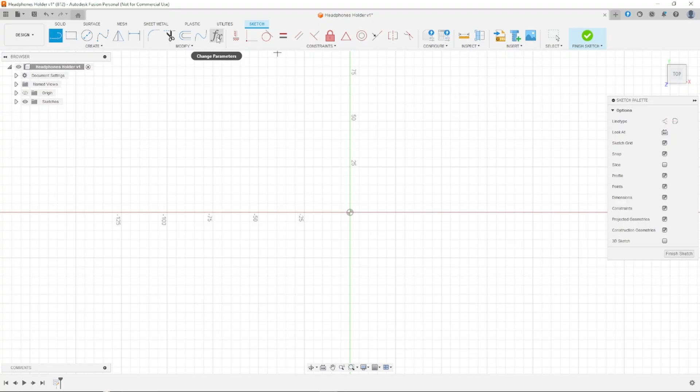After the sketch is created, I need to make some parameters. I start with main body thickness. I have a hard time deciding what the right thickness for the profile of the object should be as I eyeball the thickness using my calipers. I debate between a thickness of between 6 and 10 millimeters, but eventually I land on 6 millimeters to start with.

Next I measure the headphone's cup height, which comes to about 112 millimeters. After that I measure the height of the headband of my headphones. This comes to roughly 105 millimeters. I note in the video that the headphone's cup and band somewhat overlap each other, but I was fine with this detail and not very picky about correcting it, since it would just mean some extra fit tolerance space for the area around it on the stand.

I almost start working on the actual sketch, but try to get all of the measurements out of the way at the start here, so I continue making measurements.

Now I make the parameter for headphone depth. This is for the largest depth of the headphones looking at them from the side. Well, width if you're looking at it from the side. Which on this model is the swivel hooks connecting the band to the outside of the cups. So I measure from those points, getting 95 millimeters.

And for my final measurement, I get the headphone band depth. This will get the width of the headphone band, so I know how much room to put in the holder's hook to actually hold the headphones, which comes to roughly 53.5 millimeters.

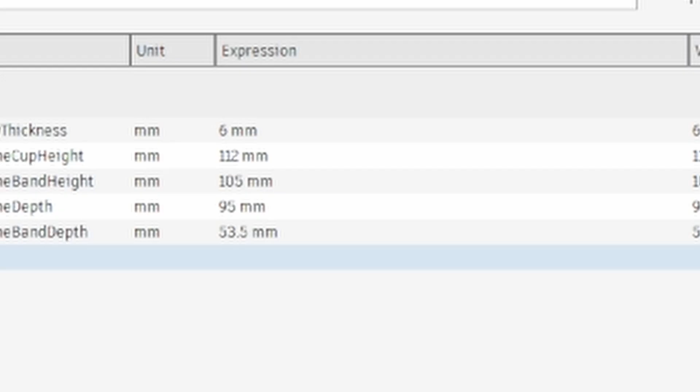After making these parameters, I start to finally work on the main body, though soon after I need to make more parameters again. So I make a parameter called stability fit tolerance, which I made equal 10 millimeters.

This is to give areas where the headphones need to actually fit some extra room, generally speaking, to fit. Then I add this and multiply it by 2 to the length of my initial drawing so far, making the string headphones depth plus, in parentheses, stability fit tolerance times 2. This makes it so that the total desired fit tolerance is calculated first, then added to the headphones depth parameter.

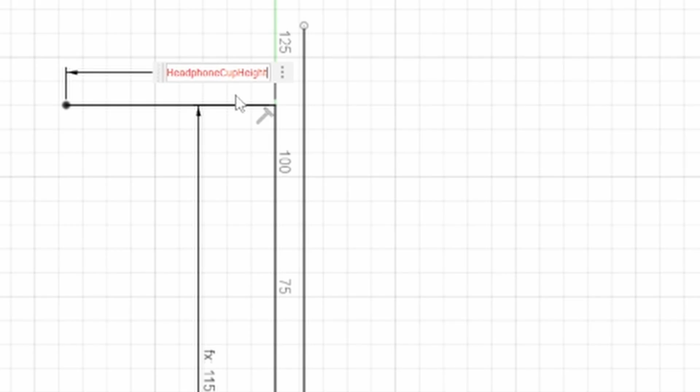I then continue to draw the basic shape of the stand. The string for the main backbone that I started calling the stem is headphone cup height plus headphone band height plus stability fit tolerance. This adds the two measured parts of the headphones together, resulting in a decent chunk of natural fit tolerance since I didn't bother accounting for the overlap that the two pieces had on each other.

That is also why I only added one fit tolerance parameter. I wanted to include it for good measure, but not completely overdo the fit tolerance.

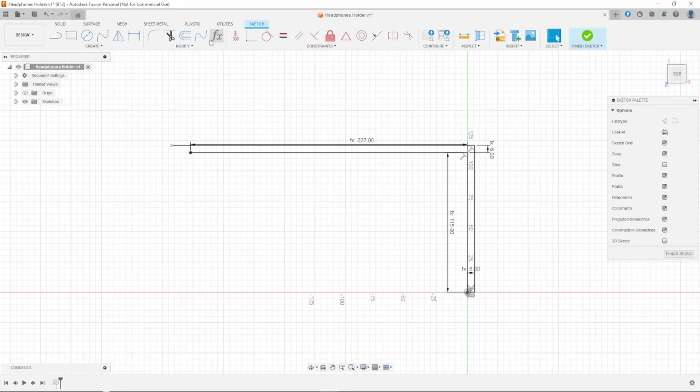Then I continued to add the outer border lines for the body, adding the body thickness parameter between them. But since I started drawing and looking at the thickness compared to the height of the part, I started thinking that the thickness wasn't going to be enough. But this is why we use these parameters. I went into the parameters table and changed the value of main body thickness from 6 to 8 millimeters and was satisfied with that thickness for the time being.

The next line is the hook that holds the headphones, so the string is headband depth plus stability fit tolerance.

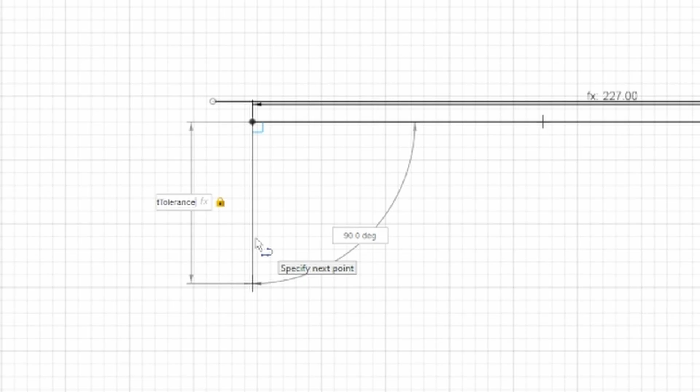I only added one fit tolerance because I didn't want to overdo the amount of extra space the headphones would have to move around on the hook. Before going on to the next line, I realized something was going to be off.

I go back into the string of the main hook line and add plus main body thickness to it. This is so the line ends at the proper point to allow the actual hook part to be created in the proper place.

I realized I never actually got the thickness of the headband to know the proper depth needed of the hook. So I take my measurement and make the parameter headphone band thickness, which comes to around 15 millimeters.

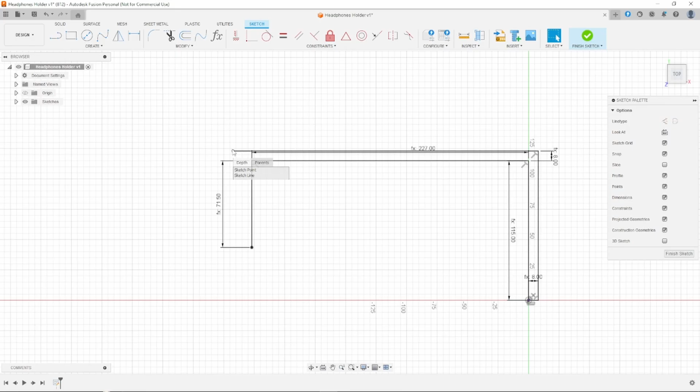To try and avoid issues with the drawing in the future, I try to shorten the length of the outer line already created, though I have issues with the snapping and getting it aligned properly. To fix this, I draw a line across the inner line where the outer line should meet it, then extend the outer line to meet with the new alignment line.

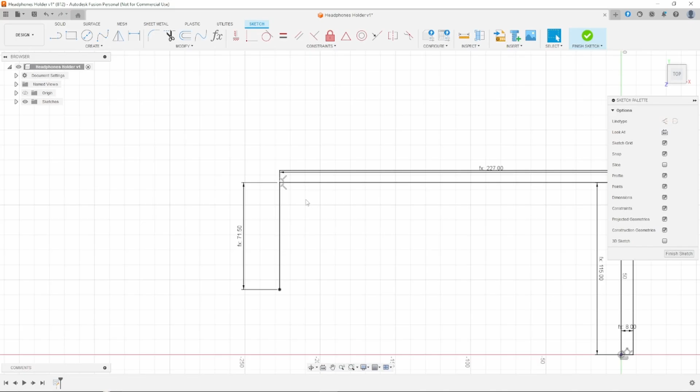After getting the right joints, I make the alignment line a construction line with the hotkey X. This will make it so the alignment line won't cut the part into different pieces and cause an interruption in the extrusion process. Just a small but useful detail.

Now I continue working on the hook. The string I start with for the outer hook is headphone band thickness, then add the top of the hook and give it the main body thickness parameter.

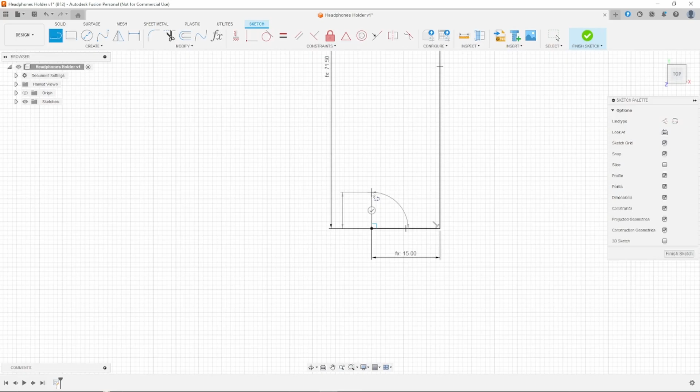I try to continue with the drawing, but it just looks weird as I draw it out. Then I realize I need to go back into the string and add main body thickness to the outer line to get the right height.

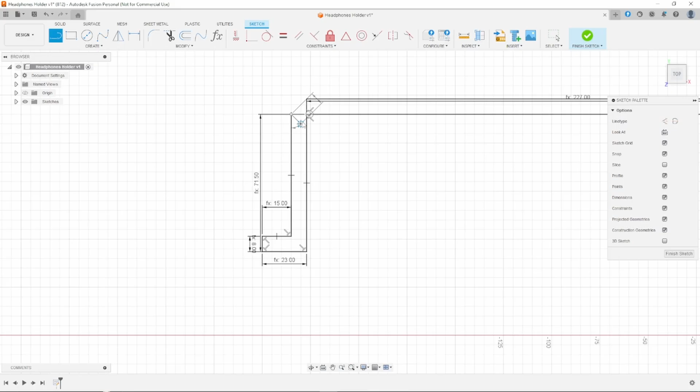Continuing on, I add the inner line of the hook and give it the headphone band thickness parameter. After that, I draw a line to match where the outer line ends without adding a parameter, since it should take care of itself. Next, I tried closing off the diagram with what I had already made, but something didn't look right. And I guess I would be right.

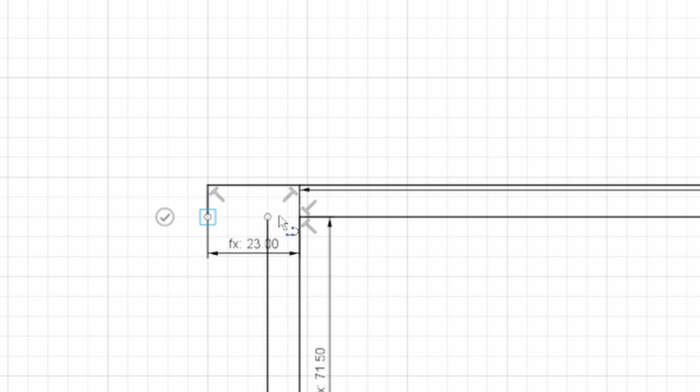I delete what I had just drawn and started working from the outer line, giving this new line a string of main body thickness plus headphone band thickness, then closed off the drawing since the lines lined up with what had already been created. Now we are ready to actually make a physical part, except for one thing.

We don't have an actual thickness for the body defined yet. So I go into the parameter menu once more and make a new one called main body width.

From there I had to think about how I wanted this to go down. The problem with how I wanted to do this model is that there would only be one depth for the whole part, at least logistically. So I needed to make a width wide enough to support and stand properly without tipping over, while making the hook thin enough to logically cradle the headphones.

The way I decided to get my rough measurement was to measure between the plastic cups of my headphones. For those following along making their own model, this works for me because the cups bend inwards. For many average headphones, this is not the case, however.

For average headphones, I suggest using your calipers or whatever measurement tool to estimate the thickness of your part's body compared to how far you are willing to let your headphones float if you don't plan on adding any rounding to your hook. If you do add rounding to the inner edges of your hook, this can supplement this issue and make your headphones fit on the stand better and rest on the post more naturally.

Or if you make it a really rounded cylindrical hook, you may not even have to worry about this at all. The downside is you probably will have to be more mindful of your printing orientation, or you may need supports depending on how steep the rounding is. But more than likely you can get away with just properly keeping in mind your print orientation while designing your model.

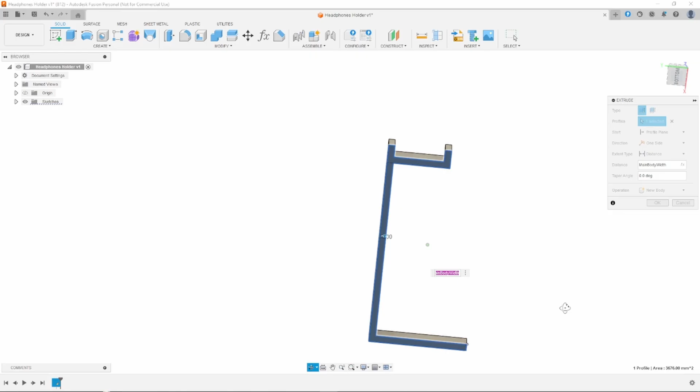Anyway, I got a rough measurement of 29mm and was ready to extrude. I applied the parameter to the function box and tried to examine the model, but I spent a long time just trying to get the camera to rotate the model properly to the angle I wanted, and failed miserably.

After extruding, I was dissatisfied with how plain and beginner-looking it was, so I decided to expand and stabilize the model. What I want to do is make brackets on the inner corners of the stand, at 45 degrees and a certain distance from the inner corner.

To accomplish this, I make a line close to the corner and give it a constraint of 45 degrees, then attach it to the other wall inside of the part. After doing that on the other side as well, I make them both construction lines.

These are only example lines to get the proper angle in the proper places. They may not have been necessary if I had just used the coincident constraint on the ends of the usable line and added the angle parameter, but this is how I did it for now.

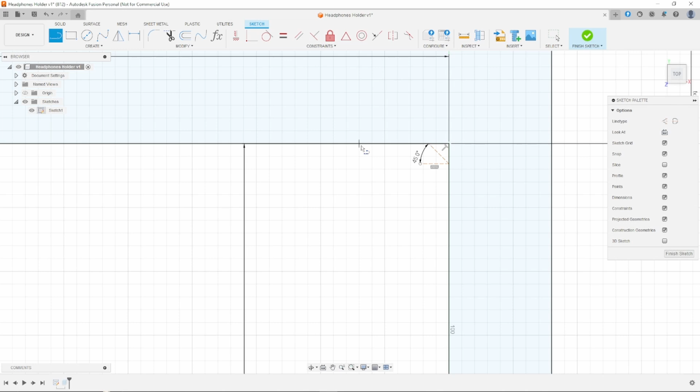I made a line between the two inner corner walls, not caring about anything other than the two wall lines being selected as the start and end points.

Then, to get the proper angle, I used the parallel constraint on the usable line and the small example line I created before. This makes the coincident constraints already created at the angle match your example line. I repeat this on the top side of the model.

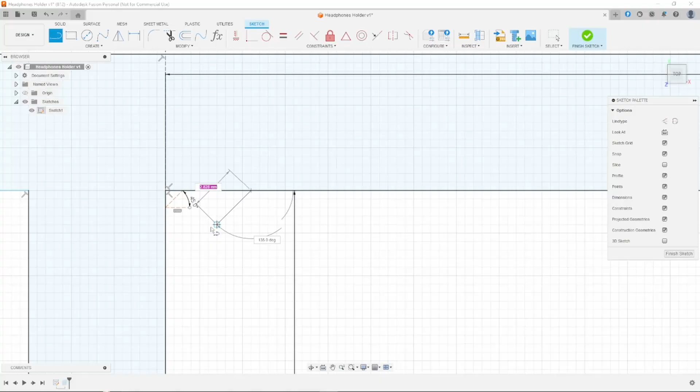Now I can simply add a dimension between the usable line and the point of the inner corner. But before doing so, I want to make a parameter for this action, called headphone holder bracket length, and give it a value of 50 millimeters to start with.

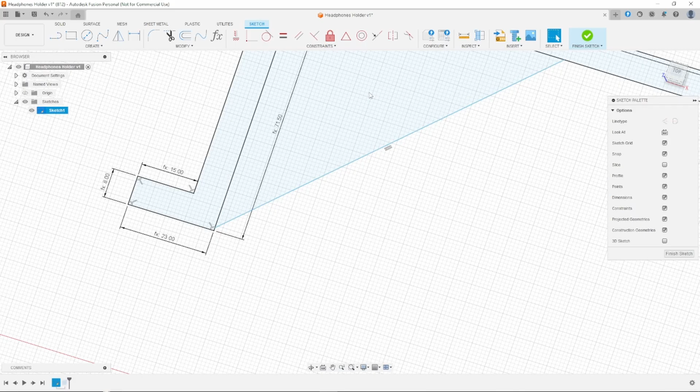So I apply the dimension, and it basically comes right to the edge of the hook. So I end up removing the length dimension and manually linking the point of the bracket with the end of the hook.

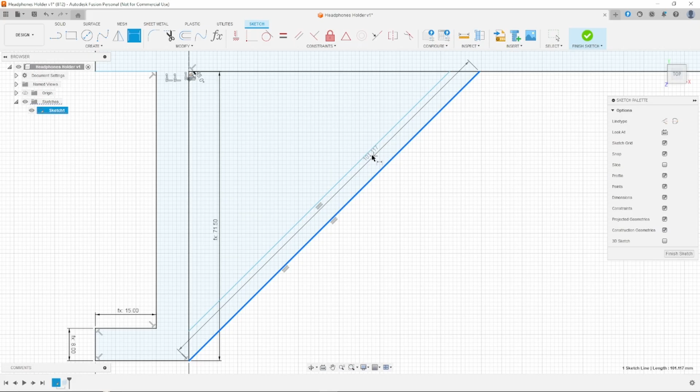Continuing on, I make another line inside the usable line geometry, again making sure to select the walls as the start and end points, but not worrying about other dimensions right now. Then I add the parallel parameter again to keep it parallel with our outer usable line, then put the main body thickness dimension between the two usable lines to give it its proper thickness.

Then I sat and looked at the model for a bit, still thinking the bracket looked too plain and featureless, so my plan is to fill it up with more struts. This will give it a little more to look at and give it a bit more stability within the bracket as well. It more than likely won't need the stability, but it won't hurt to have it either.

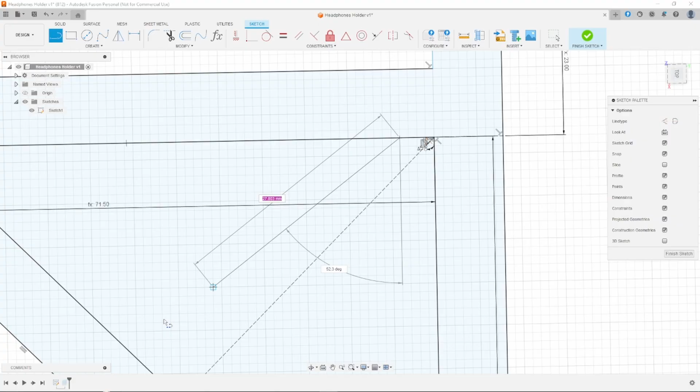To get everything in the right place, I start with a line from the inner corner to the center point of the inner usable line and make it a construction line. Then I make two lines on each side of that construction line, again only caring about the start and end points. Once created, I make them both parallel with the center construction line and add the main body thickness dimension between the outer lines.

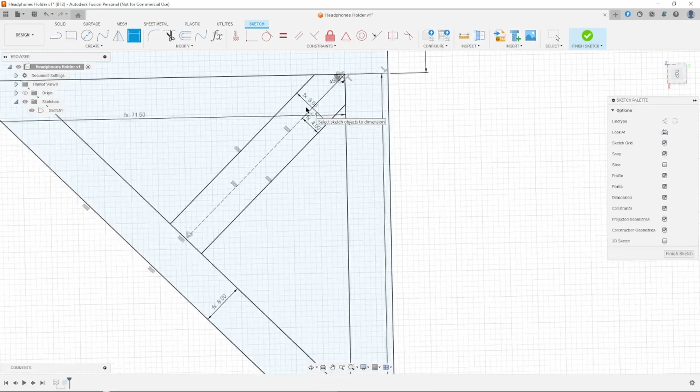And finally, to get them centered, I put another dimension between one of the outer lines and the center line and give it a string of main body thickness divided by 2. This is one of the easiest ways I've found to center geometry, other than using the center point when applicable.

Then I repeat this process for the centers on the remaining triangle areas within our bracket. After that's complete, I move on to doing the whole assembly again on the bottom, but this time actually using the parameter named base bracket distance with a value of 20 millimeters. I also remove the other bracket parameter since I won't need it anymore.

I'm worried about the size of this bracket because it has the potential to get in the way of the headphones as they hang from the hook if the bracket is too large.

I tried to be conservative with its size while also trying to make it big enough to hopefully make a supportive impact to the integrity of the stem.

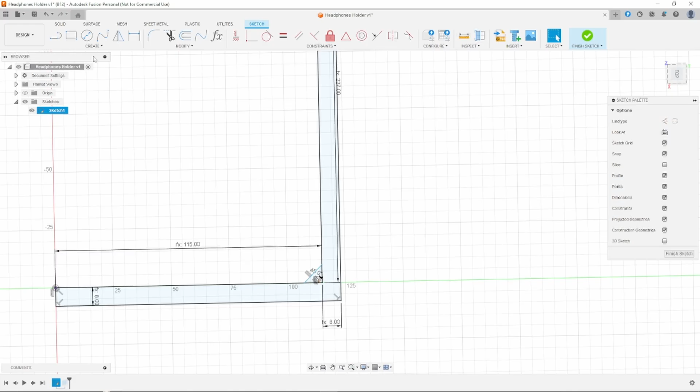Another small change is that I drew the second usable line on the outside of the first one because I wanted the 20 millimeters to be the actual inner space of the inside of this bracket, and the space is more of a concern on this one, unlike the last.

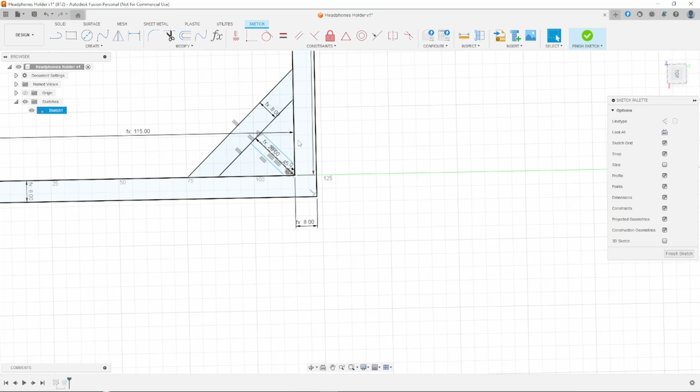The last bracket size was less important because the width and height of the headphones band should be able to reach around it without problem, most of the time at least. While the bottom is where the bulkier cups and padding on basically every headphone model are, I also only make one inner strut on this bracket because of its significantly smaller size.

After this is complete, I have to go into the working timeline and redefine the extrusion of the main body to include the brackets. While doing so, I once again have difficulty with the camera and object rotation as I try to examine the part.

So after that, once again I am not fully satisfied with the looks of my part here. So I go back into the sketch and add some fillets to the corners of the hook, spokes, or whatever you want to call them.

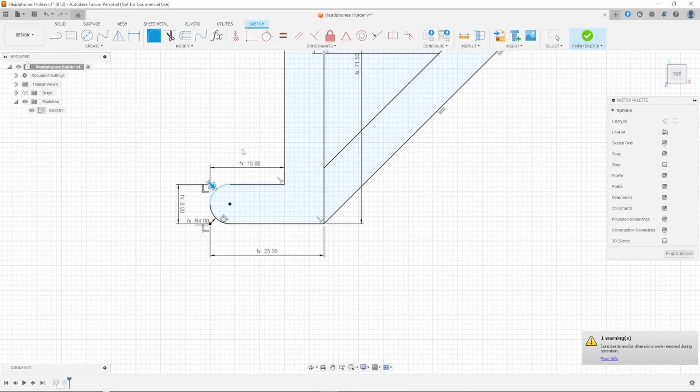To get them evenly rounded, I use the string main body width divided by 2 on both of the corners. To apply this to your designs, you just use the value of your width between the two corners divided by 2. This should result in a perfectly even rounding if the right value is used.

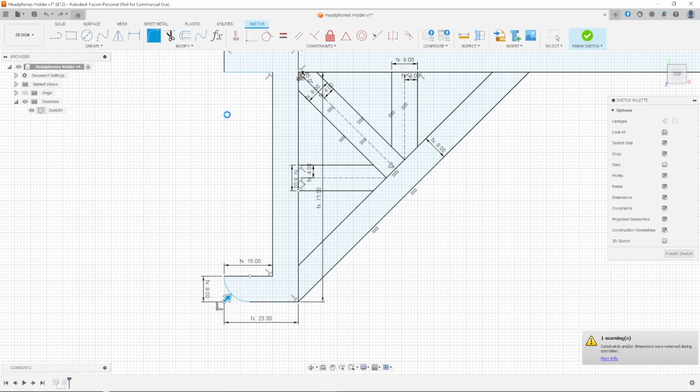However, this was soon scrapped because I liked the look and the logic of just rounding the outer corners of the spokes instead. So instead of adding the divided by 2, you just have the value of the thickness between the two corners, and you should get a perfect rounding up to the corner and the other surface.

I decided to do this for two reasons as stated before. One, I liked the way it looked better, and two, I wanted the full height of the spokes on the inner edges to ensure that the headphones band is securely stored and cradled within the hook.

Then I also applied the same rounding to the upper side of the base of the stand, but this was how I originally planned on doing this rounding for this section.

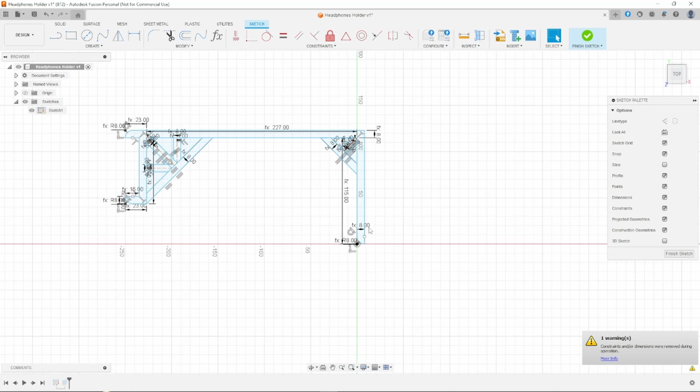Now here is a major divergence from my original plan. I should have been done here, but as I examined the model, I still worried about the stability and tippability of the model. I worried that the model wouldn't work or simply would be poorly rated on MakerWorld, where I plan to post this along with basically all my other models that I make on these videos.

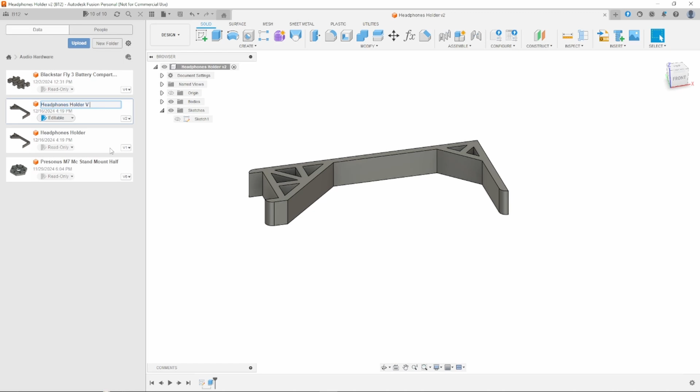So as a contingency plan, I decided to make an alternate version. I copied the model and renamed the current one to Headphone Holder V-Base, and the other one to Headphone Holder Basic. I start working on our new model by removing the original base.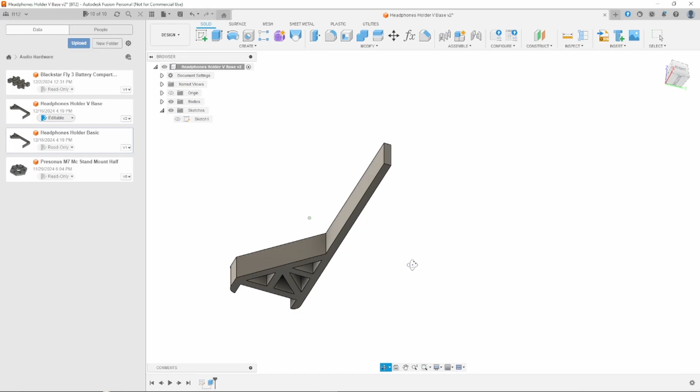To do this and properly implement the new base, I go back into the sketch and add a little line between the top of the bottom corner and the outer wall of the stem. This makes a separation of the original sketched base and the rest of the body, and the program automatically removes it because of this. But I still have to go into the extrusion on the timeline and remove the bracket now. This leaves the bottom as a blank slate for our new base.

I continue on by making a new sketch and selecting the bottom as the plane for it to work off of. I project the existing front and back geometry of the stem to get some baseline geometries to work off of. Using the back points as a starting point, I make a line off of them using the string start parentheses, stability fit tolerance times 2, parentheses plus headphone depth.

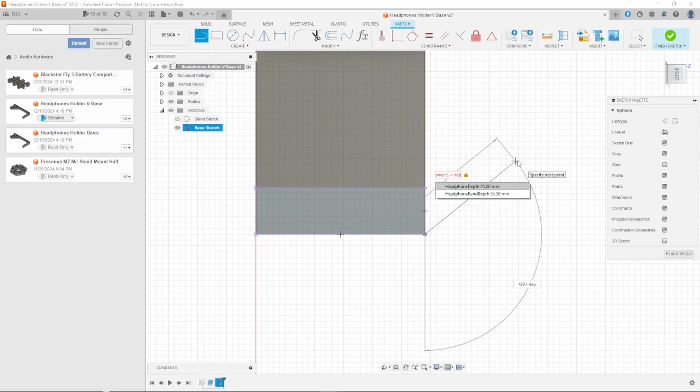While in the placement menu, to make the angle placement easier, I applied a 45-degree angle constraint on the line. Then I mentioned that I plan to simply mirror this half of the drawing to the other side. So I find the middle point of the projected lines and draw a line straight up to an extended but unimportant length, and make it a construction line.

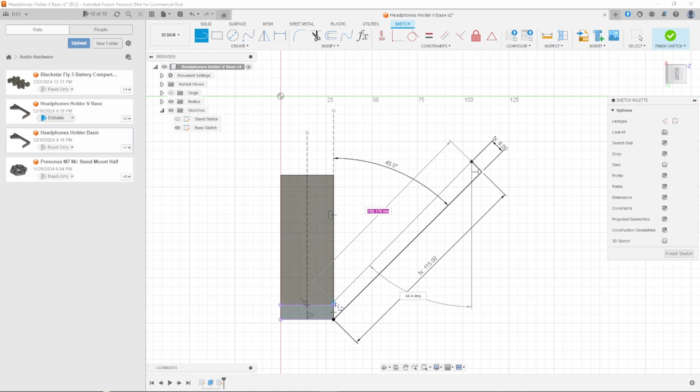Then I added the end cap to the end of our actual drawn line and made its length the main body thickness. After that, I tried to close the sketch, but it didn't look right. To start, I changed the length of the end cap to the main body width, making it significantly wider. Then I drew an extended line that went to the length of the inner project line, to make an easy intersection to complete the sketch after mirroring.

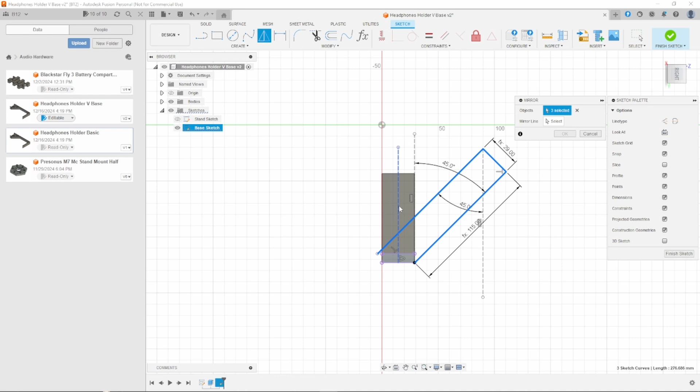With the leg basically complete, the only thing left to do is mirror it. I select all three of our created lines, bring up the mirror creation tool, and select the construction center line as the mirror line, making it an essentially perfect join other than the middle lines being overcompensated. To fix this, I take the original overcompensated line's end and pull it toward the center to try to get them to connect together properly.

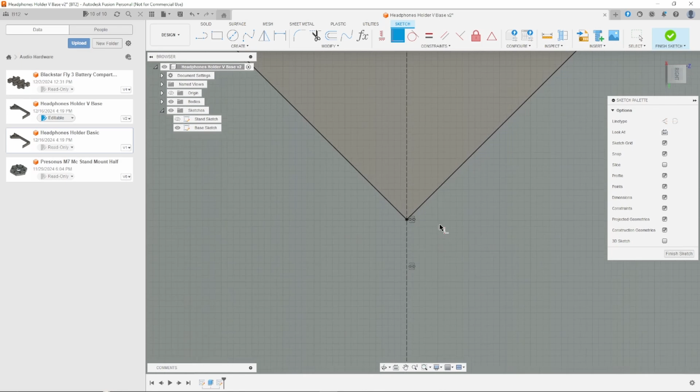However, I couldn't really get this to work by simple dragging. But the solution to this problem was even simpler. I clicked on the original endpoint and used the coincident constraint on it and the center construction line, and that made a perfect join.

All of that was so that I could round that center corner of the V stand. I made a new parameter called base inner V rounding and gave it a starting value of 25 millimeters. I applied the fillet in the sketch and extruded the base by the main body thickness value, then tried to examine the model but again was struggling with the camera.

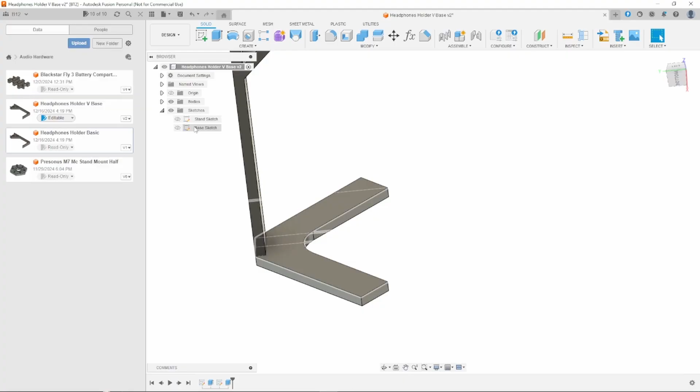Eventually I got to a place where I was satisfied enough to look at the base. I decided to open up the parameter menu and experiment with the rounding. However, I noticed that nothing was happening as I was changing the value, but I also wasn't getting any errors for some reason either.

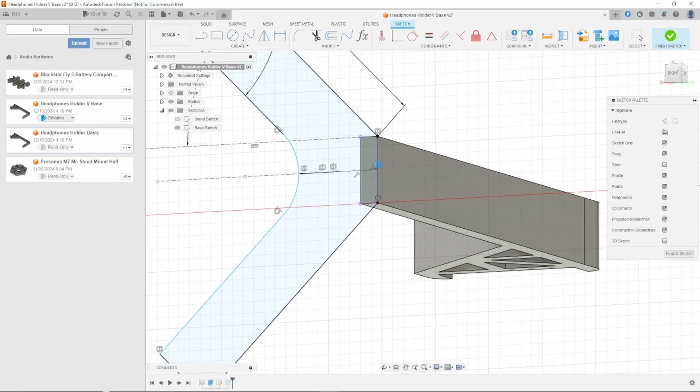So something was clearly not working right, and the solution was pretty readily apparent to me, so I went back into the base sketch and looked at the rounding's function string, and it was just 25, rather than the parameter name. Looking back, I think I just forgot to apply the parameter after making it. Just a simple slip of the mind, unfortunately.

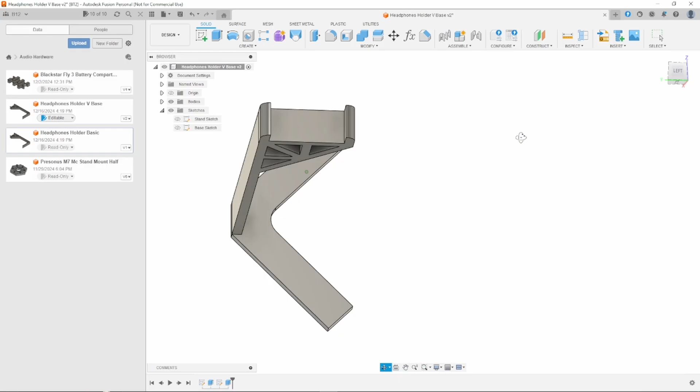So I updated this and ran into another new issue. The rounding was now uneven due to the difference in the rounding size, and the rounding caused the dimension parameter lock to be deleted. But this solution was as simple as the last sketching problem. I selected the fillet control point and used the coincident constraint on it and the center line again, which fixed the issue. So I continued with the rounding experimenting.

I tried a small variety of values and landed on 15 millimeters. After that, I added the rounding to the ends of the base's end caps using the modify tool this time, because the sketch's perspective simply doesn't accommodate doing it in the sketch this time.

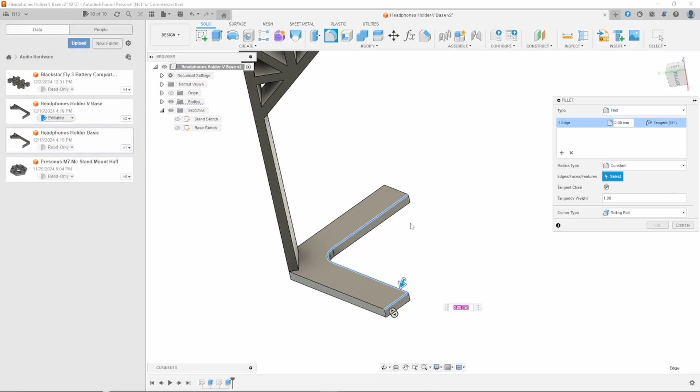Then I get really crazy and start seeing how far I can take the rounding, so I added it to the whole inner side of the base and the cap edges, and don't hate what I see as a result, honestly. But then I go even farther, applying rounding to the inner stem under the bracket and the inner spoke of the hook.

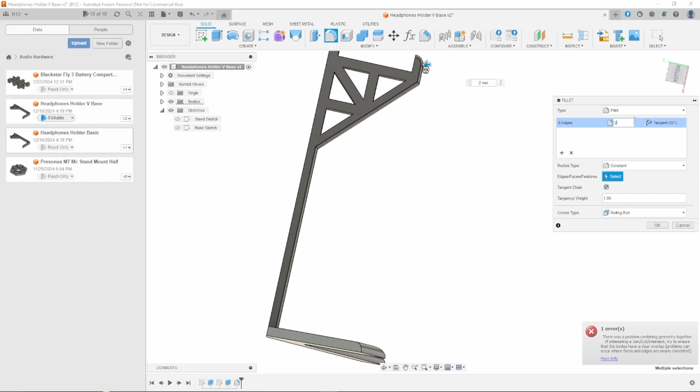I tried various values but didn't like the looks of the small rounding, so I tried the main body thickness parameter, and that didn't work either, which was a little strange to me based on my knowledge. The whole model was extruded by this thickness, so it shouldn't be an issue.

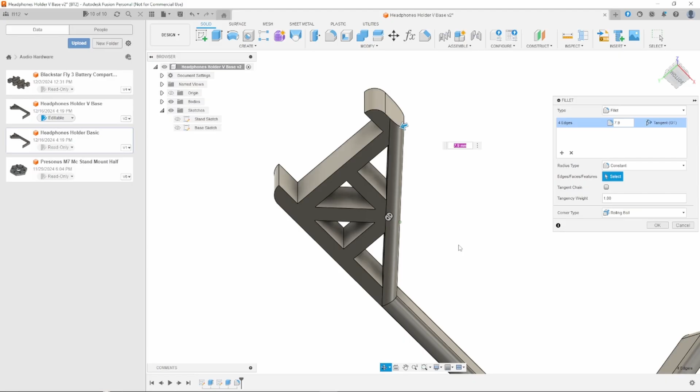So I try a tiny bit smaller with values like 7.9 millimeters and actually have no issues with that. I discovered that 7.9 is as big as the fillets can get, because for some reason there's just that 0.1 millimeters lost on the bracket. I would assume this is because of something to do with the angling, but it's not a big deal to me, and I just use it and continue on.

Then I save the model and go through the process of making that model read-only and the original model editable. I have to do this because I am on the free version of Fusion 360 and am at my 10 editable document limit.

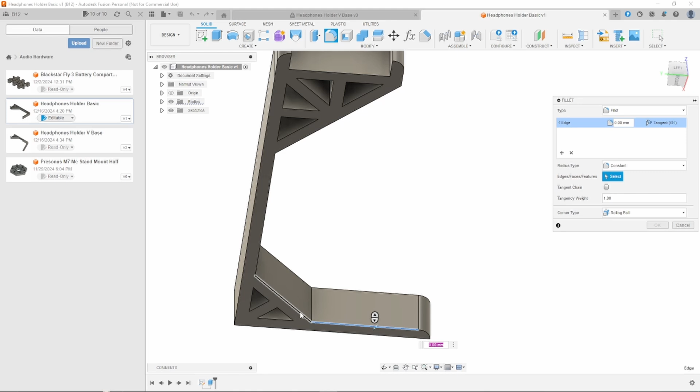I go back to the original model and add the same rounding to maintain continuity between the two models. The first rounding I apply is up the whole body except the edges of the hook spoke, using 7.9 millimeters again.

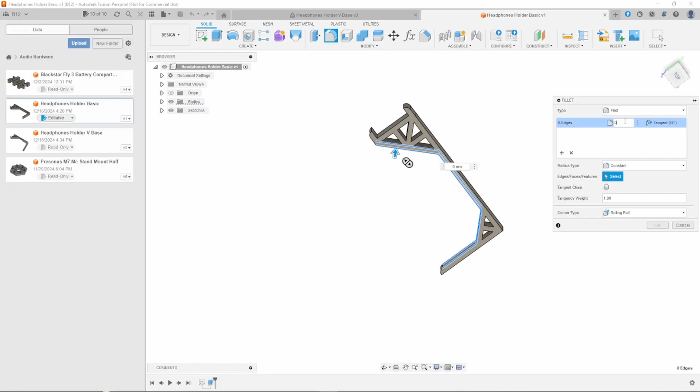But before applying it, I examine the model first and don't like how the stem would turn out. So I change the rounding back to 0 to be able to unselect the geometries. If you know a way to unselect geometries without resetting the parameter to 0, let me know.

I unselect the inner stem edges and reapply the 7.9 rounding to examine the rest further. I'm satisfied with this rounding and save the new model. Since I removed the stem rounding on this model, I decided to remove it on the other model too, to maintain continuity between the two.

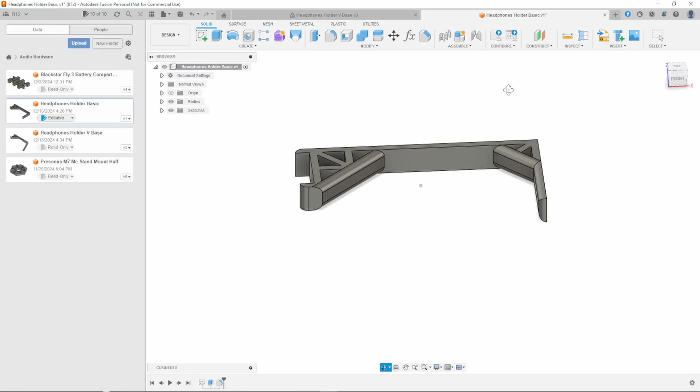But looking at the V-base model again, especially without the rounding on the stem, I start to dislike the base of the stem being a basic 90-degree angle again. So I decide to experiment with incorporating the base bracket back in.

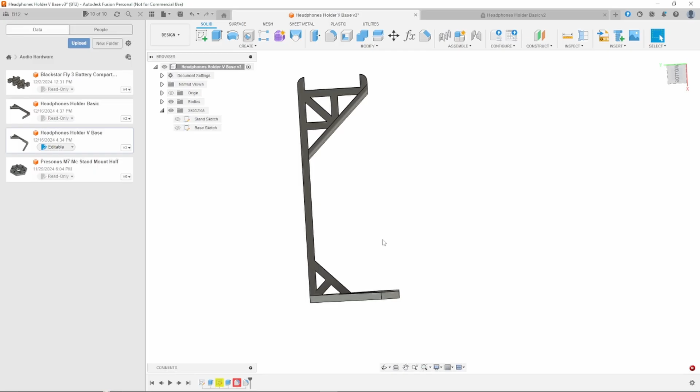I start this process by going into the original extrusion of the main body and including the bracket back in. This leads to some inconsistencies, unfortunately. First, the bracket's geometries interfere with the full rounding of the base, so that rounding has to be deleted from the working timeline.

Next, the base sketch relied on the stem thickness without the bracket included, but with it included the base got wider. However, Fusion does have a backup solution for situations like this. Unlike the rounding, which had a red highlighted error in the timeline, this one only has a yellow one, because the sketch was referencing geometry that technically isn't there anymore.

Instead of having a meltdown, Fusion just adds a construction line in place of the removed, no longer existing geometry. Since this was the way it is, I just leave it, because it wasn't causing any real harm, and I would probably just make more issues trying to fix it. So this error goes effectively ignored.

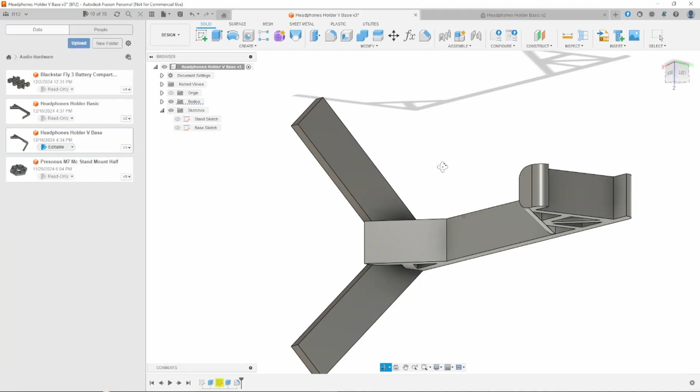Now we're onto our last issue that adding the bracket caused. Because of the V shape, the bracket's bottom wasn't resting on anything. This has an easy enough solution though, as long as I'm willing to compromise.

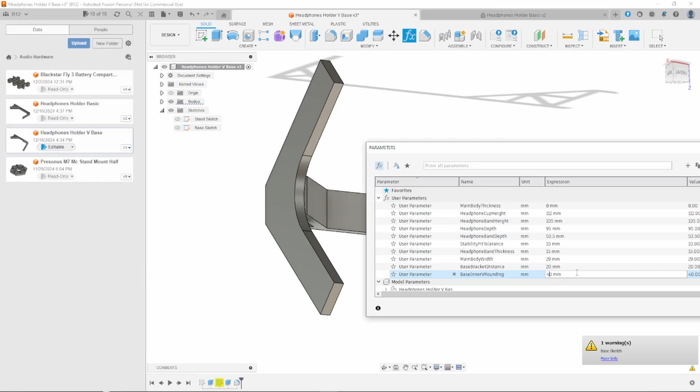Instead of having the deep and small rounded V, I'd have to go into the parameter menu and experiment with making the V shallower and the curve much bigger. I experimented with enlarging the radius of the fillet until I got to 50 millimeters, which got really close but just a bit too short, then ended on 52 millimeters to have the geometry come just a bit past the bracket end.

Next I work on putting the cap and edge rounding back in place. I acknowledged I couldn't put the rounding the whole way across anymore, but I was hoping to get a little more rounding out of the base. Unfortunately, this just doesn't work, at least with the basic filleting tool.

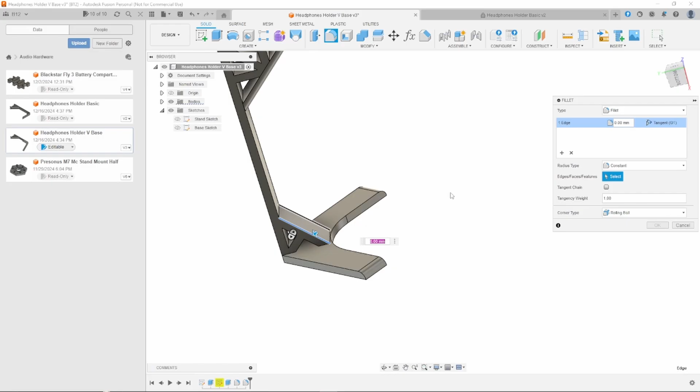So I compromised again and just added the rounding to the end caps of the base again. Then I decided to add rounding to the bottom bracket to match the top one, which for some reason accepted the full 8 millimeters rather than needing the 7.9.

So I save this model and feel I'm finally ready to export and import them into the slicer. I exported both models as STEP files, to start a better habit and to do a small service to the people who download my models.

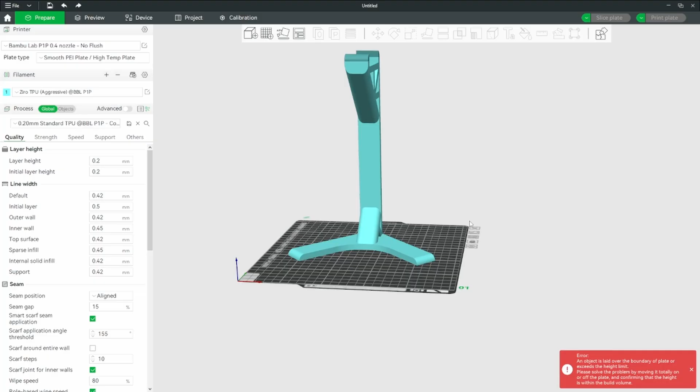Once I imported one of the models into Bambu Studio, I got an error. It stated the model was too big for the build area, which I hadn't even considered while designing this model. So I looked up the max build area of the Bambu Lab P1P, and it was labeled as 256 millimeters in all axes.

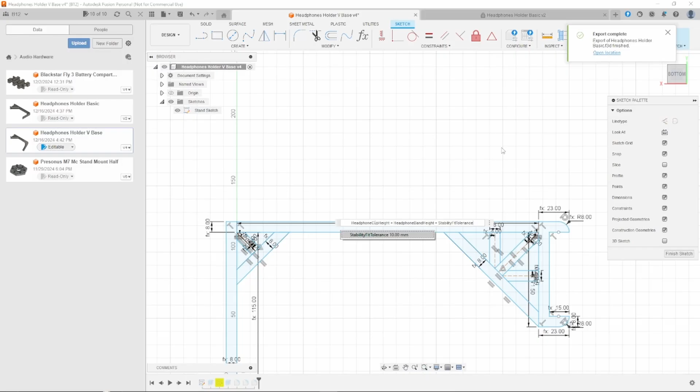My model was 258 millimeters tall, 2 millimeters too tall unfortunately. So I had to go back into Fusion 360 and remedy this. I did this by simply going into the main stem dimension and adding -3mm on the end of the string, an extra millimeter of safety cushion.

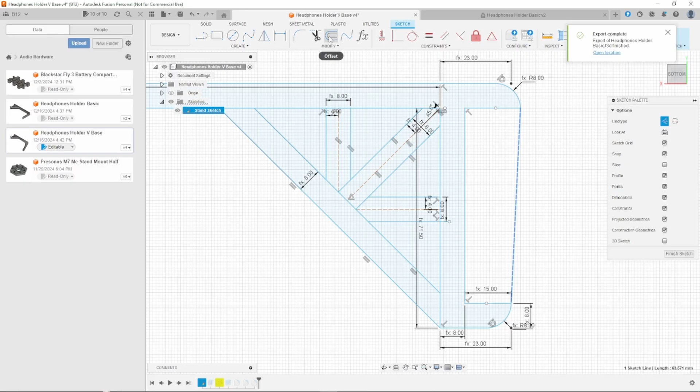Unfortunately, this fix wasn't as cut and dry as I tried to prepare for. The base of the hook didn't move with the shrinkage of the stem, so I had to add a dimension between the outer and inner lines of the hook's base and give it the main body thickness parameter value. This caused one of the spokes to move down with the base of the hook, but the other stood its ground. To level the largest one with the properly sized one, I drew a line connecting the inner corners of the spokes and used the horizontal vertical constraint on the line.

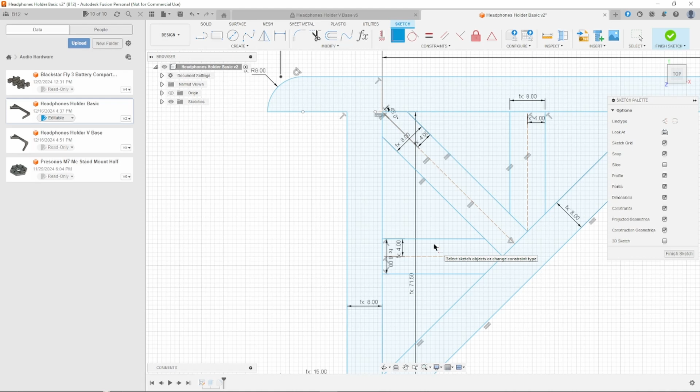This forced the less constrained bigger spoke down to the properly sized spoke's level. These were the only inconsistencies, so I saved the model and went through the process of switching the two models' editability again. I then went through the same process on the basic model as the V model. Once I finished that, I saved and exported both models again and tried importing again.

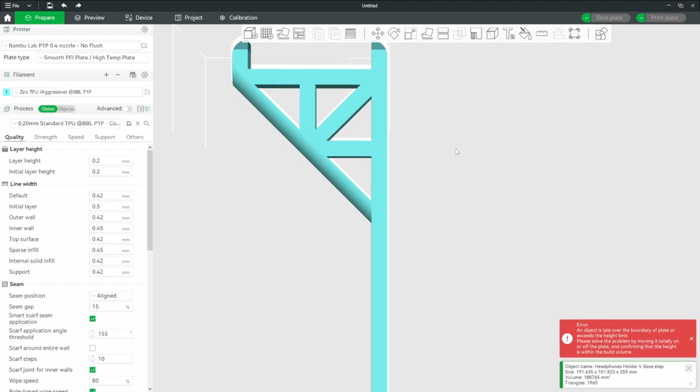But as I imported the first model again, I got the same error, even though the overall height was now 255mm, just under the supposed build volume. However, I noticed this darkened part of the model which shows how it's crossing over the limits. So I used the in-slicer scaling to see how short I actually had to make the model. As a lucky guess, I started with 250mm, and that was right on the money. Even 1mm higher, and it claims the model is too tall.

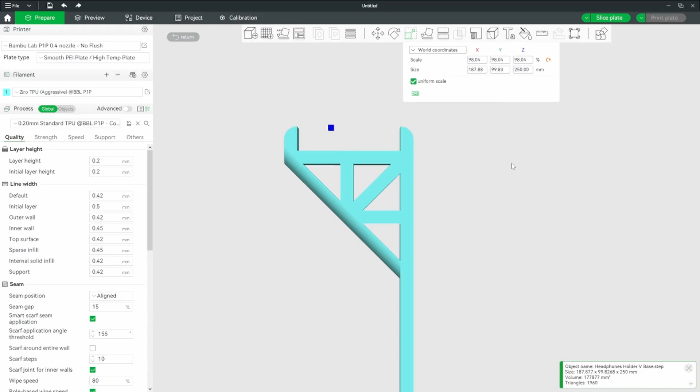I stated in the video that I do know you need to consider the rail limitations and the extra height lost from the print head sticking down a bit, but I figured Bambu Lab would have accounted for this in their marketing material.

Anyway, now I go back to the process of shortening the models by 9mm instead of simply 3. I don't have to deal with the inconsistencies because they were already fixed, but I do have to deal with switching the editability again to make both models the right height, and re-export again. Now with that process done, I import the first model and no error.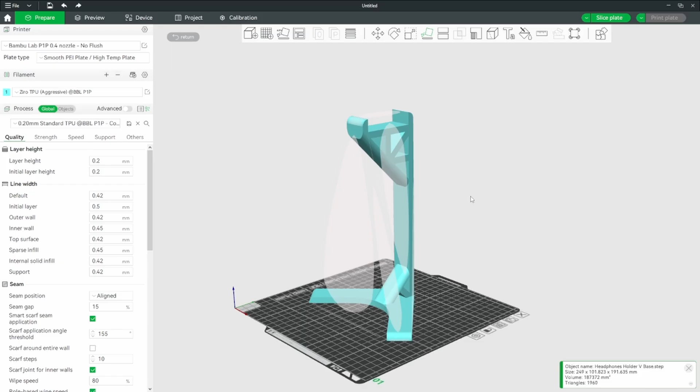Okay, cool. Now I have my first model, but I want to try to print both of them at the same time. Can I do it? Yes, I can. The only worry I had was fitting both of them on the build plate, and I was able to achieve that semi-easily.

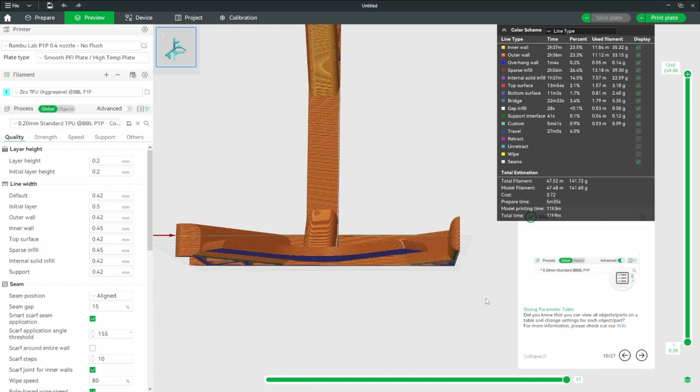So now I can actually slice and check out the models from that perspective. However, I immediately notice a small issue after slicing. The side rounding on the base model, meant to print on its side, is slightly too steep and would either look a little poopy or need a small bit of supports. I really didn't want to put supports on these models, and for the most part I specifically designed so that they wouldn't need them in this case.

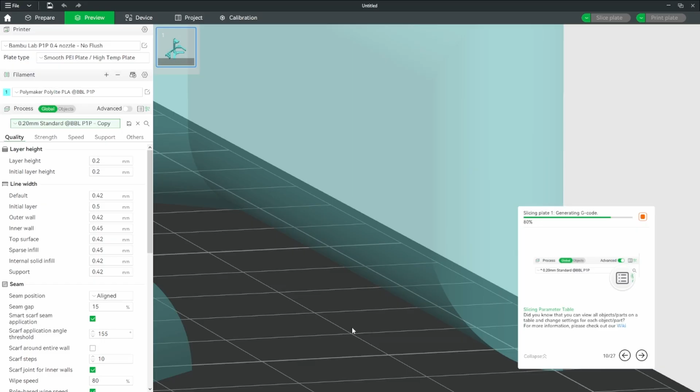However, along the way, I forgot to design for 3D printing and forgot the intended orientation, and just focused on the looks. So I bit the bullet and went back into Fusion 360 once more, switched the editability again because of course I ended up on the wrong model, got an ad for Malwarebytes, and simply deleted the entire rounding section on the workflow timeline. I then saved, re-exported, and re-imported into the slicer.

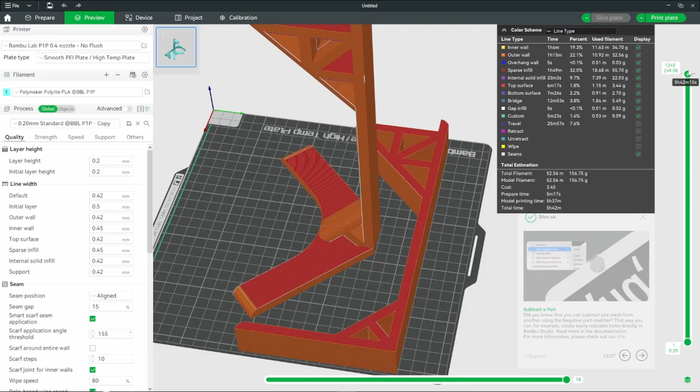I forgot to mention that at some point I changed my filament and print profile in Slicer. My normal PLA print profile has no supports usually, but my TPU one does, I guess. So I switched those settings and looked over the model quickly and didn't actually notice anything bad. So I sent the print to my printer.

Here is the live footage for that. Okay, so here is mostly all of it printed.

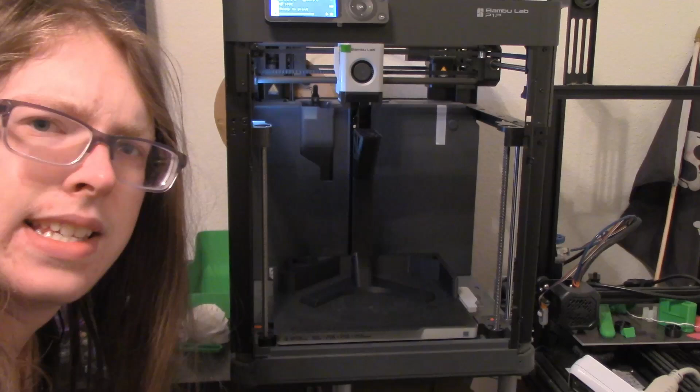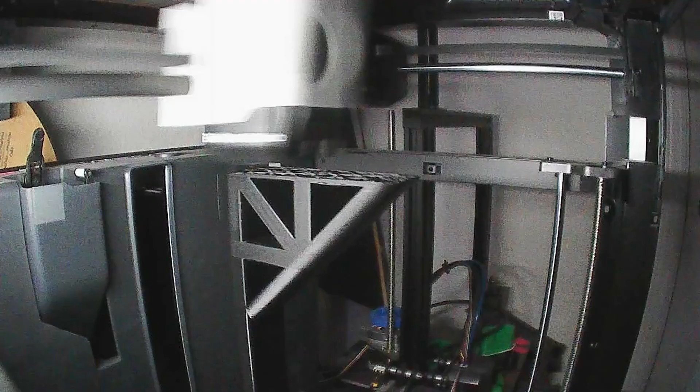However, I did have to stop this print because unfortunately for some reason the nozzle started to constantly get caught on the top here, on the top of the print. And what would happen is it would cause the face of the extruder, the magnetic face, to just pop off, and then it would pause the print and try to go back into it. So it would sit here, get caught, and start doing weird stuff. So unfortunately this one is kind of a bust right now.

I need to try and print it again, unfortunately, which is a real disappointment because it got literally 90% of the way through. And the fix, I don't know how to fix this, honestly. I don't know why it's doing that. That's something I would have to look up. But we do have the other one.

So it's possible a little bit of rounding would have helped on these sides, only a small bit, not nearly as much as we did. It would help for print removal, so I'll probably add that afterwards. But yeah, I guess we just have to see how this works.

Okay, so here is the stand. So now we're just going to see how this works.

Well, there you go. So there are some changes I can make to make this model a little bit better. I think this is mainly an issue with these headphones because they are simply so big and bulky, but the stand could come out a little bit farther because it's still pushing up against this a bit, which holds it at a slight angle, but that might honestly be helpful in general.

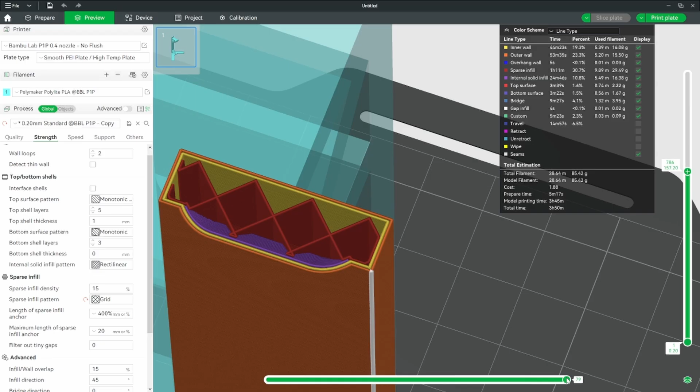Now I was using grid, but it's less about the actual pattern and more about how the pattern is actually laid while printing. You see, on the grid-style infill, it has to intersect itself pretty often. And instead of avoiding the already printed lines that are there by hopping over or trying to stop the extrusion while going over them, it just simply plows through and keeps building over top of the existing lines.

Now, I'm not sure what the exact issue is here because these infills work for average size prints, but not tall prints. So my assumption, though not necessarily a fact, is that there just isn't enough room for the Z-hop to compensate and get over the poorly executed infill, thus creating the catching and causing issues for many users making tall 3D prints on these machines, or using the slicer in general.

Most people have their prints fail because of this, but since I had so much surface area from my base, in conjunction with my third-party PEI or whatever style build plate, it was holding on for dear life. Rather than falling off the build plate, it stood its ground, and the stem just took the brunt of the catching, then violently snapped back into position from the plastic's deflection.

It was impressive, but also pretty scary because it was a loud ordeal, and not the type of sounds you want to hear coming from your 3D printer.

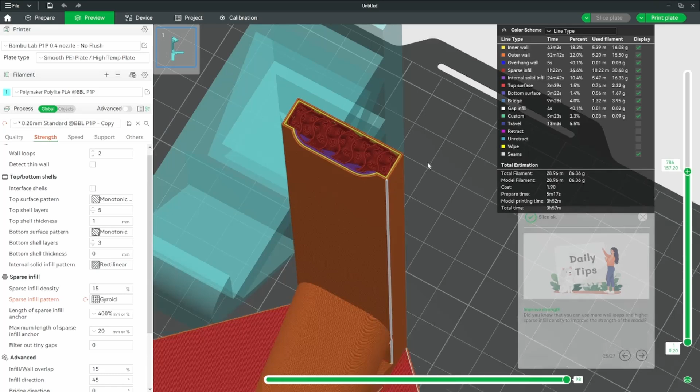Now, how do we fix this? Well, we simply have to find an infill that works for our model that doesn't intersect itself. Gyroid was recommended on the forum that I was learning from, so that's what I went with. I lowered the infill density from 15 to 8% because the gyroid seems to be much more dense compared to the cubic. Then I let it go, which brings us to where I am actually writing the script now, so I guess I'll see you in a bit.

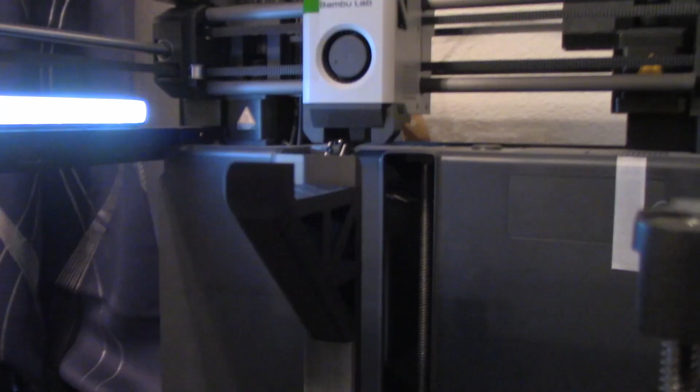So here is the newly printed model, completely done. It's kind of hard to tell, I don't know if the video is coming out better than what the viewfinder is showing, but it's pretty dark. The only technical issue is that there is some banding here. You can kind of see it in the light.

And this is where the ends are, it's hard to show this. I'll just pull it off and then we'll talk about it. Okay, so here is the print removal. I believe the last one was firm, but not super difficult. Let's see if this one's the same way.

Yep, alright. So that could have probably ended badly if it hit the wrong thing. It might have snapped off. But this was pretty strong based on the printer video that I took off the SD card.

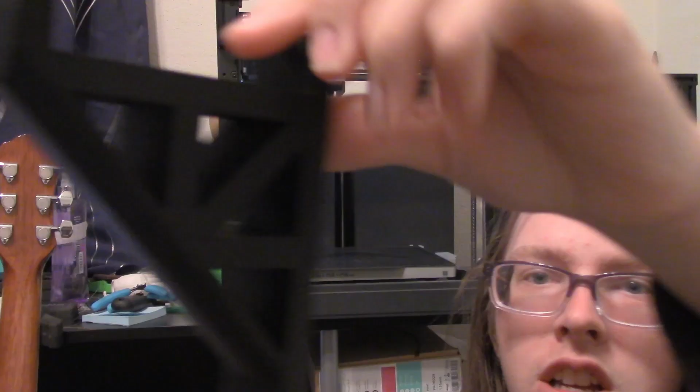So yeah, there is some banding here. I don't know if you can see it, it's probably not going to focus properly. But there's some banding that happens around here, and it's because of something to do with how it reacts to the spokes, or whatever these are that you want to call them, the struts, the supports. It's just how it reacts, but it's only a minor issue. It'll be functional completely, and it's not super pretty, but it's functional.

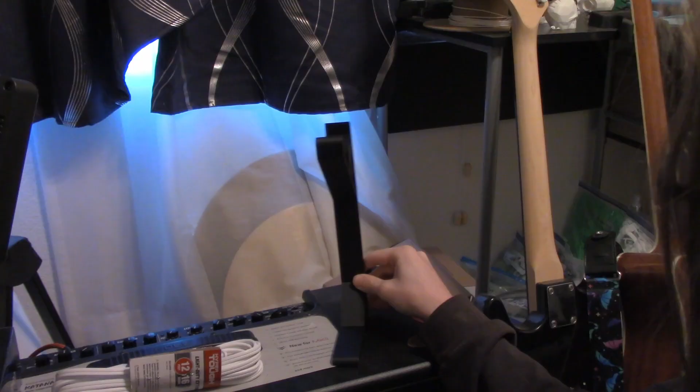So let's see how well it functions. Here is the other stand that I used for the other video. As you can see, this one is not great for typical use because it can very easily be tipped over, but for displaying purposes and mainly one-time or occasional uses, this would work pretty decently.

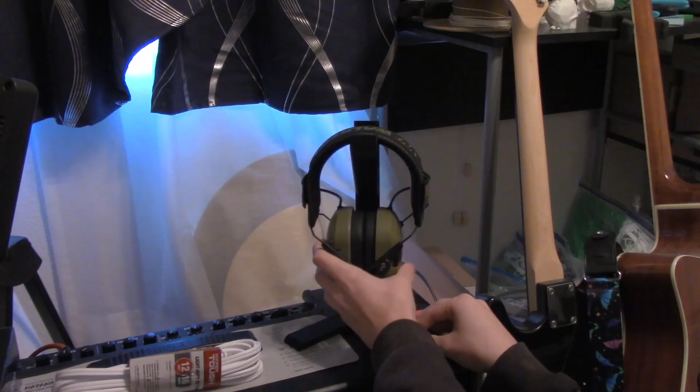This one is meant for people who want to use this a little more frequently. So it sits pretty well. Unfortunately, it is a little tippy in the back.

I could put a little bit of support in the back here, especially since I'm already printing upwards. I might add that in another separate version, but yeah, it's pretty easy to take these on and off, and the only reason why it's really tippy is because I don't have a weighted base for this, which I would love some suggestions on how to weigh down 3D prints with as little material as possible, because I just cannot find out.

It's been a long time since I searched, but I don't think I could find a whole lot on weighing down 3D prints for the most part, at least not actually effectively. So yeah, this works. I might add a little bit of triangle on another separate model, and these will be available on my Maker World.

Let me show off the model a bit. God, this picture is kind of dark. I don't know why, I don't know if it's just my viewing angle or what.

So, in hindsight as well, if I really wanted to make this model perfect, what I would need to do is, since these headphones are so bulky, even though for displaying I think it looks pretty good with the slight slant, if I wanted them to hang straight down, this back wall would have to come forward and this whole thing would have to come out just a bit so that it would properly hold the band in place, but there would be enough room to support the backside to have room to hang straight down. So just another suggestion if you are building your own version of this model.